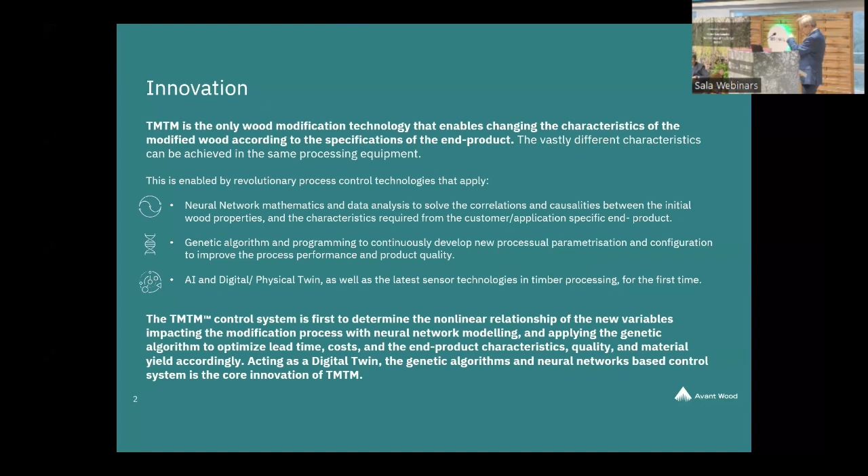Let me see what happens. Here, I'll go through this very quickly. Maybe I even skip this. So this is the main frame, because that is too much technology. I'll come back to that.

So there is the global problem as we see it: a lot of CO2 emissions in nowadays building construction industry. We have a lot of wood waste. We want to improve the utilization rate of timber. And there are, as we heard yesterday, hundreds of underutilized, low-value wood species that could be utilized.

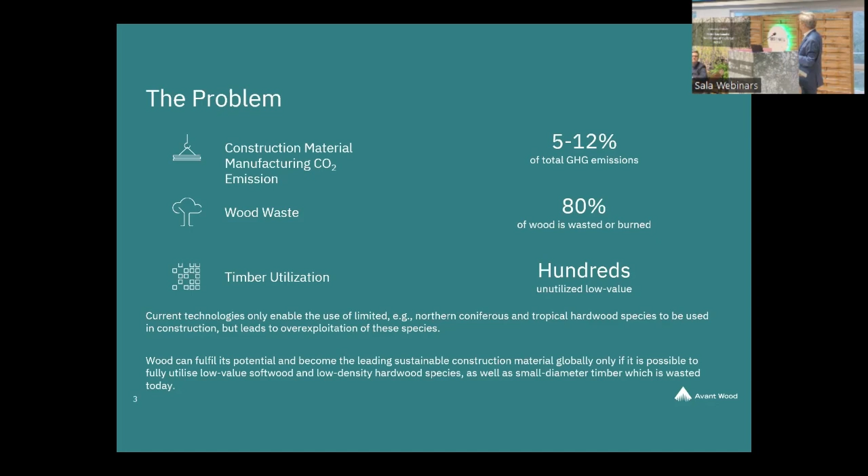Our solution here is an integrated technological unit that combines the drying of timber with densification of timber, in order to enhance the mechanical properties, hardness properties, dimensional stability, equilibrium moisture content, permeability of the timber, and so forth. There are few boxes; this is integrated, and the key issue is our patented control system that we apply in the process control. And that's about it - no chemicals and sustainable.

I want to highlight a little bit the philosophy of how we are approaching this problem. There have been a lot of keywords in this seminar, but maybe for the first time I say artificial intelligence, which is seen as a high-level future technology that will solve all the problems from climate change to social equality, whatever. I hear politicians using that word a lot.

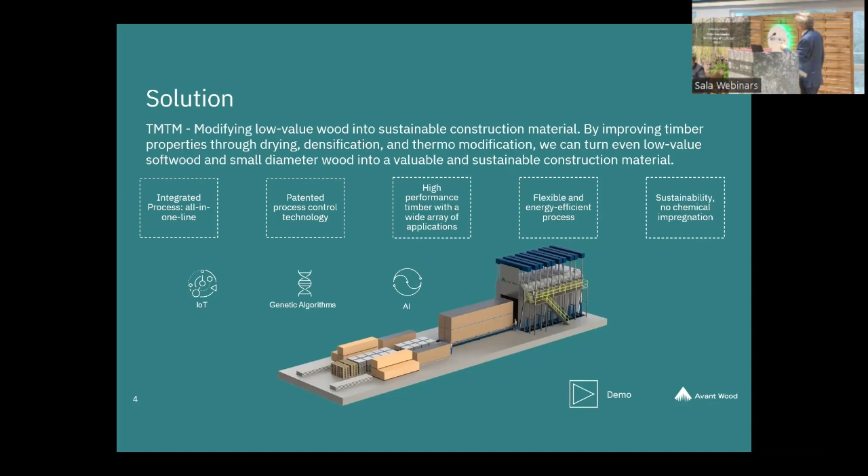But here is our approach to the problem, because artificial intelligence itself doesn't say anything - it's two words. So from our prospect, artificial intelligence is, first of all, deep sensing. We have a lot of different input parameters in the timber, and at the other end there are a lot of customer expectations coming up, like color, hardness, strength, density, dimensional stability. With existing solutions, when you process timber, you get standardized 2x4s, with moisture content being about 18 to 10 or 8, and that's about it.

But we are solving this, and it's a never-ending story. So first of all, we are using neural network mathematics to find the correlations and causalities between the inputs.

Is there a laser here? Yeah. It doesn't... it works here. It works here, but not here.

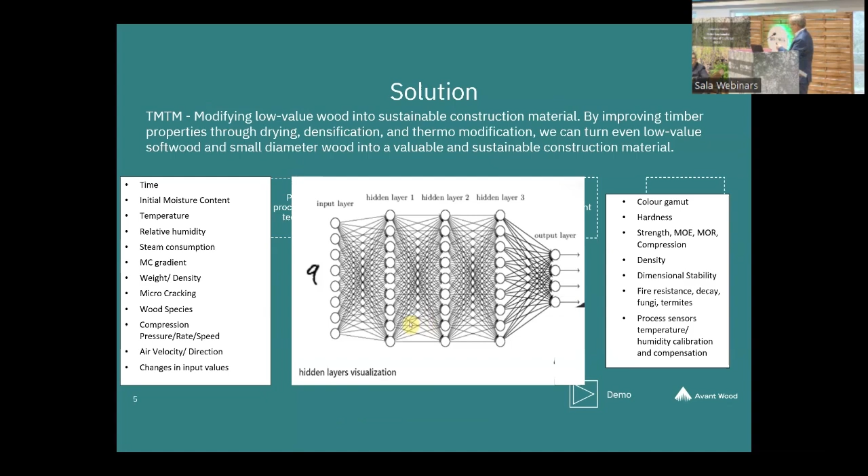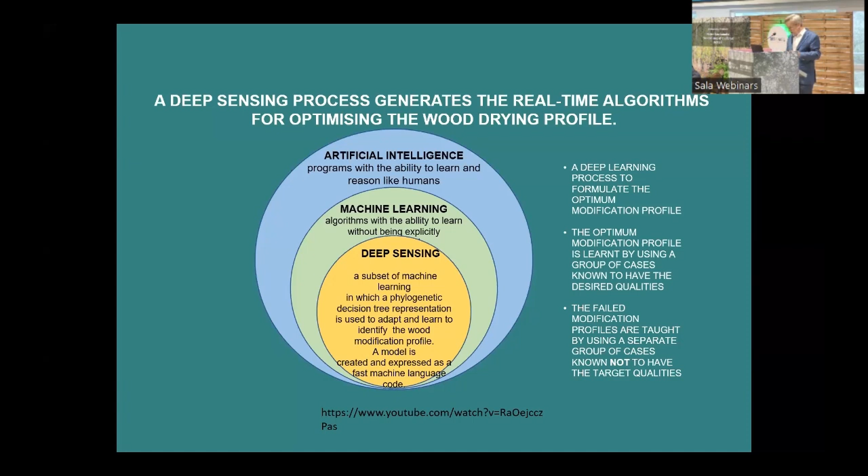So we aim to find the correlations and causalities between the inputs and the customer-specified outputs. That is deep sensing for us. Then we apply machine learning, genetic algorithms, to continuously improve the process parameters in order to get an improved and customized end product. And then as a whole, there is artificial intelligence that has the ability to learn like a human. I see artificial intelligence this way: you need to have the application, not just talk about the general level.

So this is a brief presentation of our process, in very general form. So you have

green timber that you put in, and simultaneously we apply a certain mechanical pressure to the timber. We don't use sticks, we use aluminium cell plates. Three reasons for that, and we can apply mechanical pressure on timber in the beginning, just to hold them straight, avoid warping, twisting, things like that.

And then we increase the temperature. We take care of the relative humidity and all the things. We can, so to say, listen to the timber, because when the parameters are wrong, the first thing that the wood starts to

make is emitting so-called ultrasound, around 150 kilohertz emission, related to the microcracking of timber. So then we know that the process parameters are getting wrong, and they have to be adjusted.

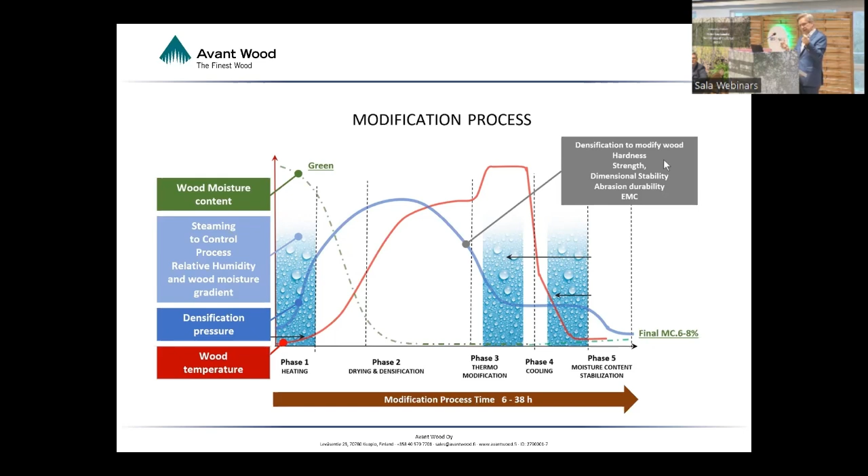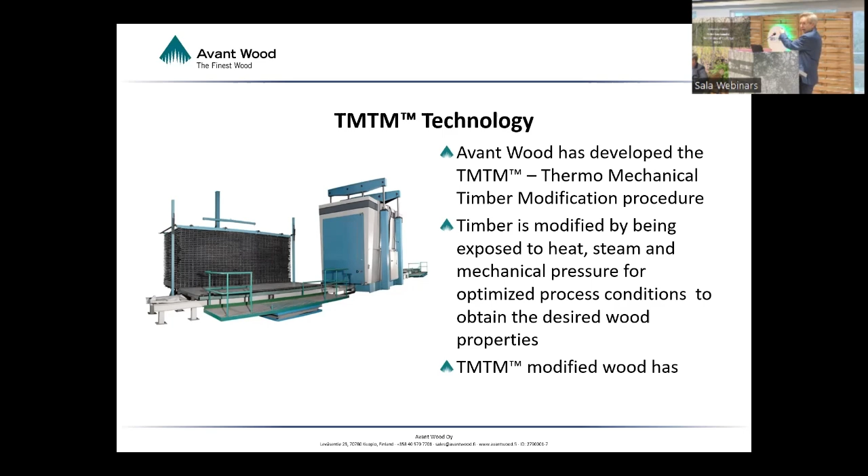Let's go where I'm going. This is one example of the unit in Slovakia. And yeah, you can all read. There is all that I have already said, but

I added some slides here. That's why. What are the advantages of the product? As said, customized products, increased density, high dimensional stability, because we lower the equilibrium moisture content and also improve the permeability of the wood.

Sustainable, no chemicals used in the process. You may select the application that you want to do.

It's not the— I have nothing against UPM or Stora Enso or Metsä, which are the big Finnish companies, but obviously you cannot order anything specified for you. The processes are mass production paradigm based, whereas we want to have it

as you would call mass customized paradigm in the process. I'll take a little bit back. Yeah, so this is overall, Andreas, you discussed yesterday about the value chain and creating the new value chain. This is how we see that in the forest you have big logs, you have small logs, and then you

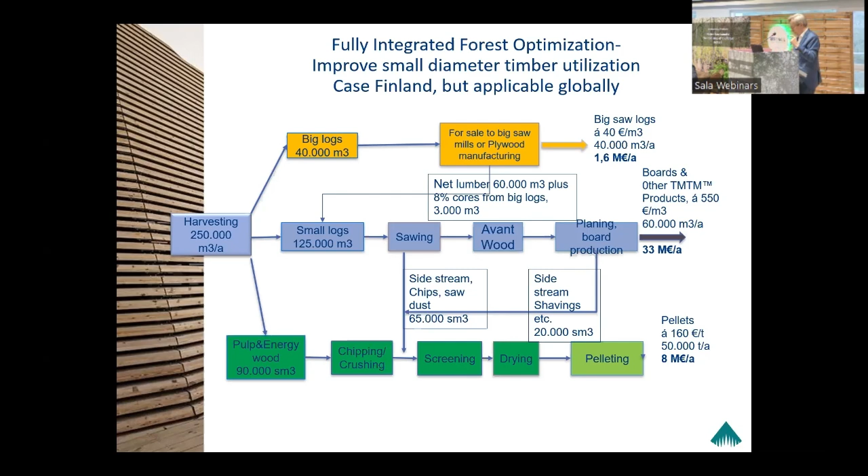Now I'm trying to— this is our testing unit. So what we call, as you remember, talking about artificial intelligence, one keyword is the digital twin, where you can test the process parameters. We have a physical twin.

We can make with this, it's about 1.5 meters long. We can make the modification schedules of different species, and when they are approved, then we can kind of upscale the results to the customer, and then we can provide them with the new modification schedules.

And when I said that we cut off the lead time by 90%, it means that the customer can make a new product creation much faster than with the conventional way.

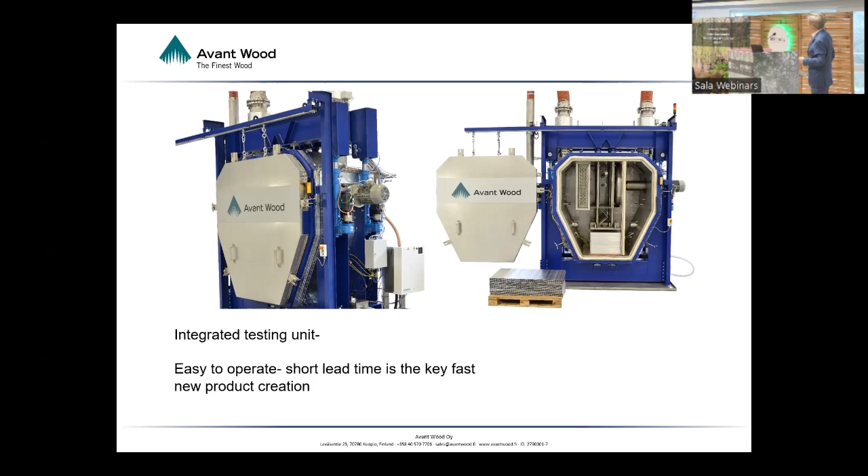Yeah, that is already spoken about. Also spoke about the benefits. Megatrends, we discussed about those.

We believe that there are, in our business model, four megatrends: sustainability, renaissance of the wood material, resource scarcity that we have been discussing, and then digitalization and artificial intelligence, which is our core competence. And those megatrends will affect all the society, customers, technological development, competencies, and so forth and so forth.

So that is the base. But now I'm coming to a business case example.

One is, I'll go through this fast, a multi-layer parquet. Usually when you make, for example, oak multi-layer parquet, you take a plank of say 50 millimeters, and you dry it around 3 months.

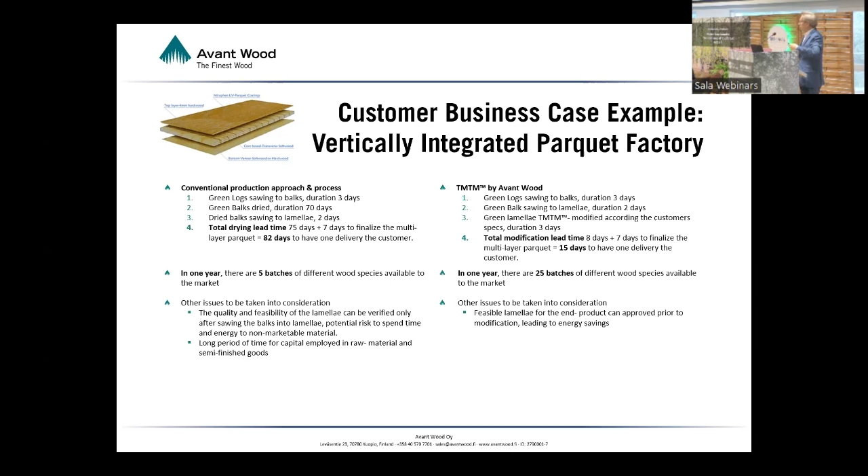There is the same case but I'll skip it.

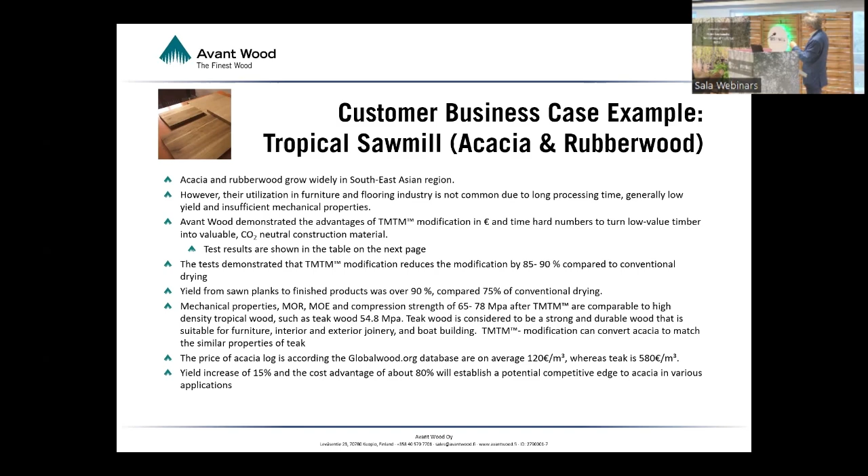Since we are active globally, we had a case in Vietnam and Malaysia. We improved the utilization of acacia and rubberwood. Here you can see the results: we reduced the lead time by some 85–90% and simultaneously improved the mechanical properties.

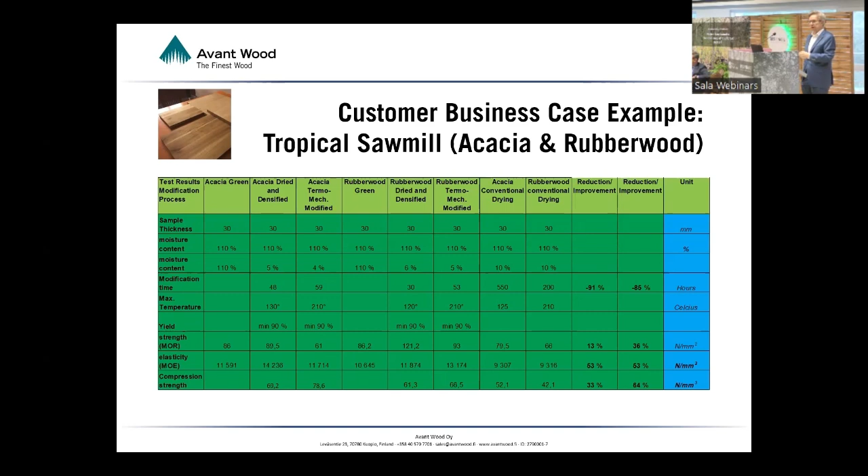Sorry Pekka, we are out of time. I am out of time, that's why I'm... Two minutes please, thank you.

And we discussed, that's very typical for me, this building in Helsinki, Löyly. We brought there 18 kilometers of glulam board, and if you take a close look, it's all made of small diameter timber. The blocks of the building were 75 millimeters thick, 18 kilometers of wood, 6,000 different pieces and modules. So far, since 2017, zero complaints about the material.

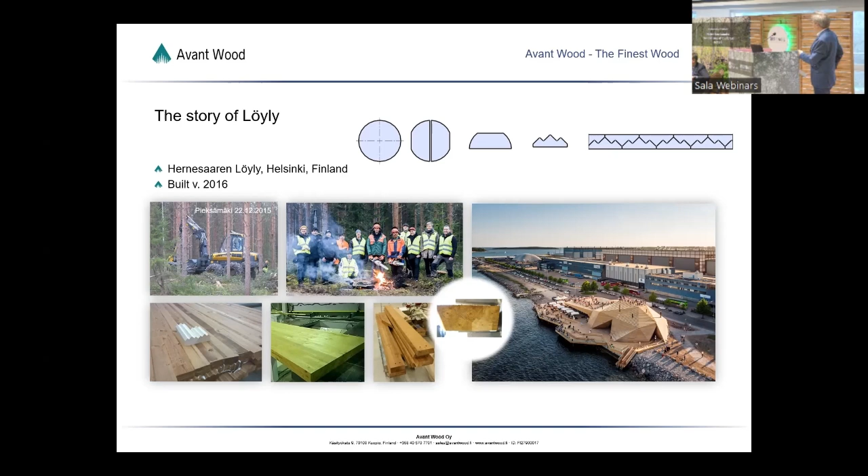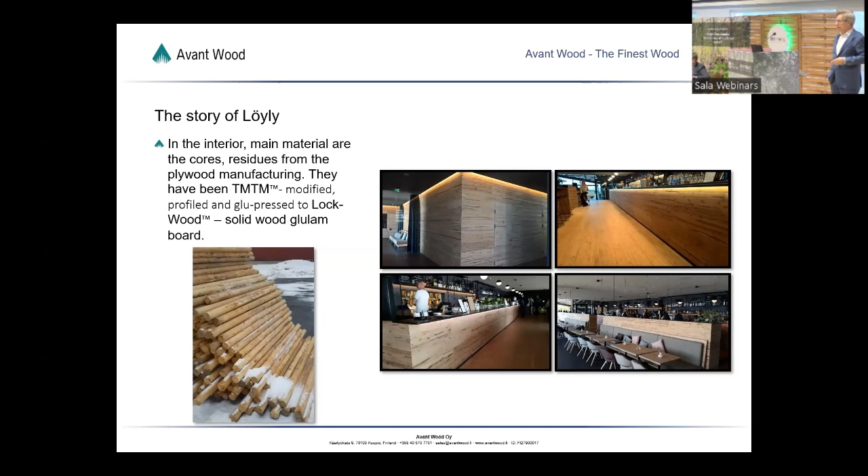Right, and now I'm running through. These are from the inside, made of cores, as you see, residues from the plywood industry which have no value, and we converted it to a valuable end product. The value of the cores is something like 30 euros, and then we sold the material around 800 euros per cubic meter.

Here is from the forest, and here also. There you can see the glulam board. We have applied only small diameter timber. I would like to discuss with you the Lock-Wood, our innovation, but not this time.

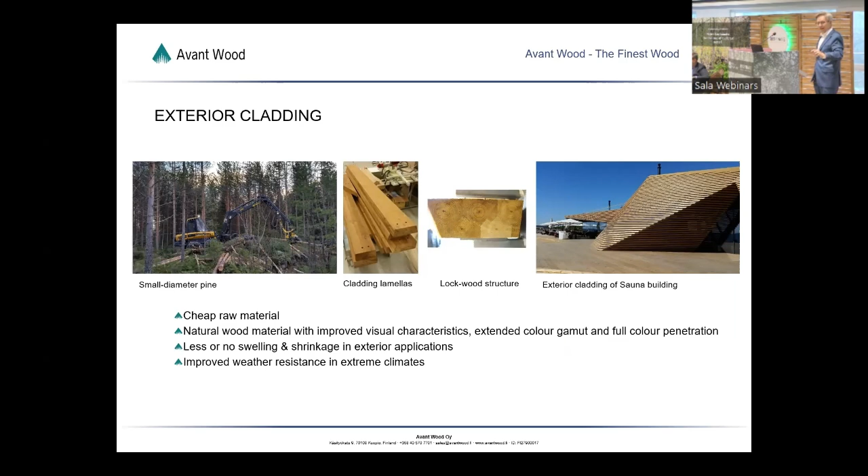Yeah, everything is made of that. There is juvenile teak plantation and falcata. They are all over the world.

This is one I have to have a minute for: OPT, oil palm trunks, a source of global catastrophe in terms of CO2 emission. There are 100 million cubic meters of OPT that you can utilize, and 100 million cubic meters per annum every year.

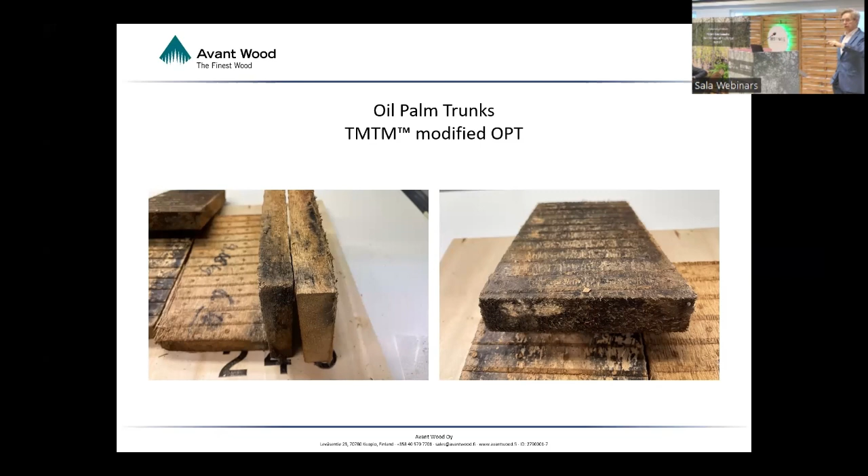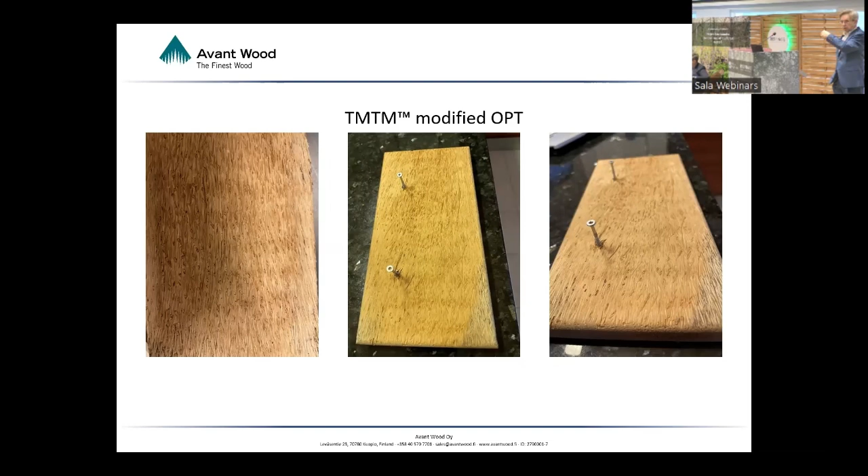What we have made, we have converted it with our process into a usable board from zero-cost material. And this is the final result. We are now in the process to put it on the market. Sorry, yellow card.

In Bhutan, not going through the wood species, the Bhutanese brought us 31 species of wood, and we used 33.5 hours to modify them and give them the feasibility study.

And now we are in the creation of a mindfulness city in Bhutan, where they are building up a wooden city bigger than Singapore. That's it. Okay, thank you.

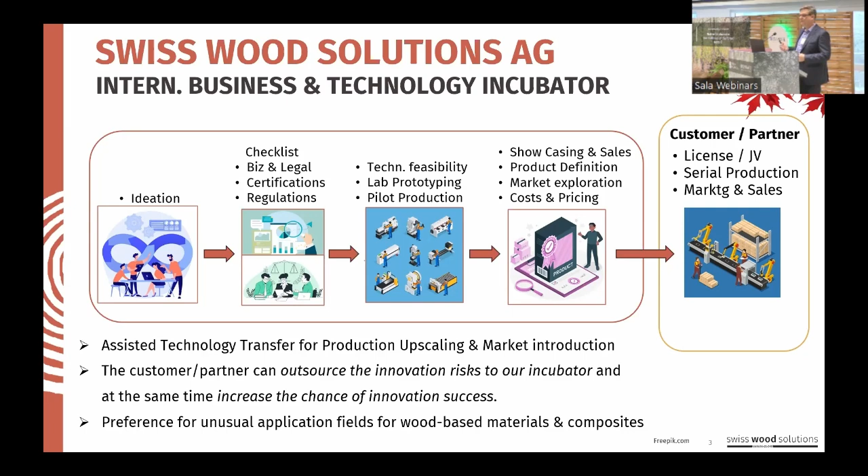We keep the IPRs on our side and license this out to him. So in the end, the customer can outsource his innovation risk to us, and he increases his chance of innovation success. That's the basic idea of our technology and business incubator.

And this time it works. So let me give you a brief intro into our technological approaches. We have more than one, but the core technology is the Green TM+ process. It's kind of related to what Pekka told us—not really the same, but it comes close, a little bit different.

We also apply it to different materials, so it's always a combination of timber or veneers plus additional other materials. This is not necessary, but sometimes it's needed. With this process, we can modify hardness, density, color, mechanics, dimensional stability, and we integrate additional functionalities—this can be optical or electronic functionalities. So we add something to the wood composite.

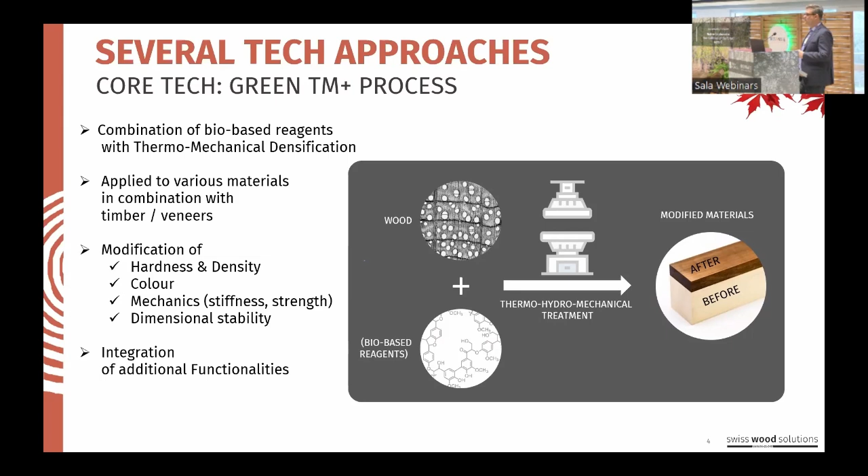This is an example, just to give you an idea about the machinery needed for this process. Of course, you need special machinery, as you can see. For example, with the beech example, if you would like to densify it from 740 kilograms per cubic meter up to 1 ton per cubic meter, you would need machinery capable of pressing with 8 megapascal. So you cannot do it with standard wood industry machinery—you need something special.

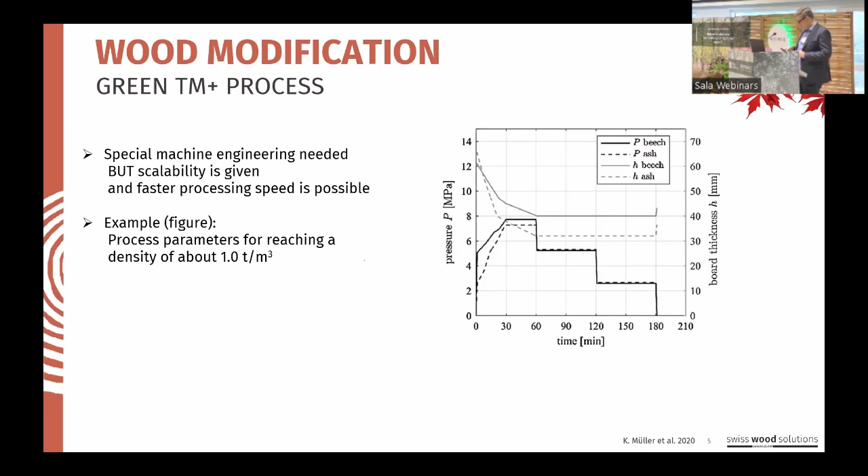It's just one example. In the end, the material remains highly anisotropic, as you can see. The resulting mechanical behavior is, among other parameters, strongly influenced by the angle between the grain and the densification direction, but also depending on the load direction when you use the product in the end. So you really need to know what you are doing with the wood and what the product is needed for in the end—otherwise, you cannot really optimize the process.

As you can see, when you densify in the radial direction and then test it with a compression test in the longitudinal direction, you have a strong correlation between density and compressive strength—that's the diagram on the left. But when you do the same densification process and then test compression radially, you have this correlation not at all. So you need to know what you do with the product in the end, and adapt the process accordingly. But in the end, our material is not brittle—it still retains its highly appreciated ductility.

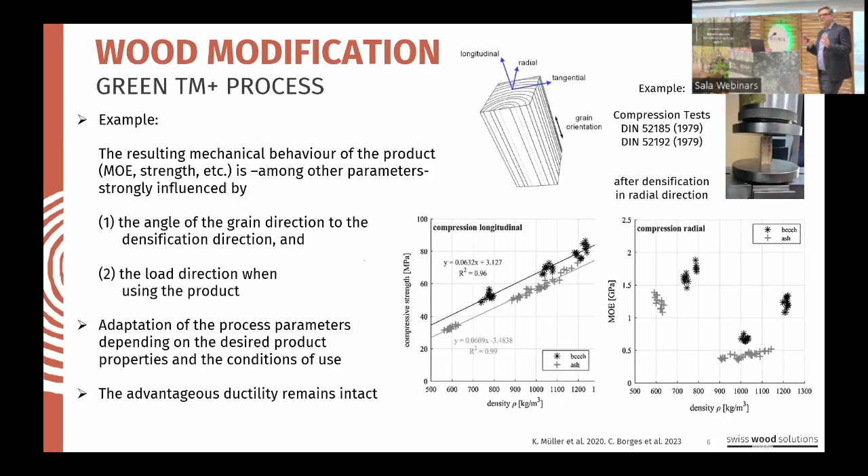Christoph Henschel came up with the idea to improve the sound of his Stradivari, which was quite ambitious. He took away the ebony fingerboard and the string holder, the tailpiece, and we replaced the ebony with spruce, specially modified for this application. We have a very high speed of sound conductivity along the grain, and very low acoustic damping.

This depends on the wood species and on the modification process, and in the end it was really what he thought was needed for his instrument. He's still playing it now, three years later, and he's still happy with it. He says yes, Stradivari would have applauded this.

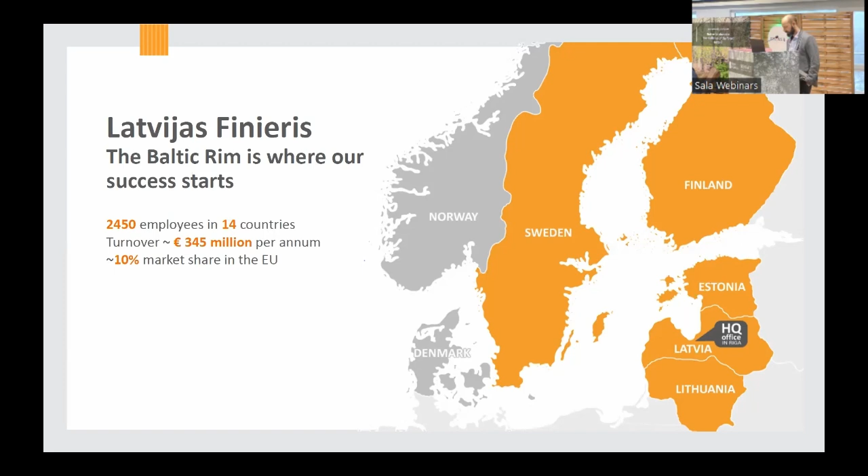Our main focus is on the production of birch plywood, but we are also expert in other areas. For example, we grow birch seedlings in our own tree nursery, which we then offer to forest owners and forestry companies. We are also active in forestry and offer services such as reforestation, soil plantation preparation, planting and maintenance of forest areas, timber transportation and other forestry work.

We also have our own metal working factory, where we manufacture and assemble all necessary equipment for our own production and research, but also manufacture machines for other customers. And like any manufacturing company, plywood production has many different byproducts, and this gives us the opportunity to develop other products with higher added value.

We have therefore identified ways to use 100% of the byproducts we produce, and one of our latest innovations of the use of byproducts is the extraction of betulin from birch bark. Even as a plywood manufacturer, we also have our chemistry department, where we are working on sustainable binders - but more on that later.

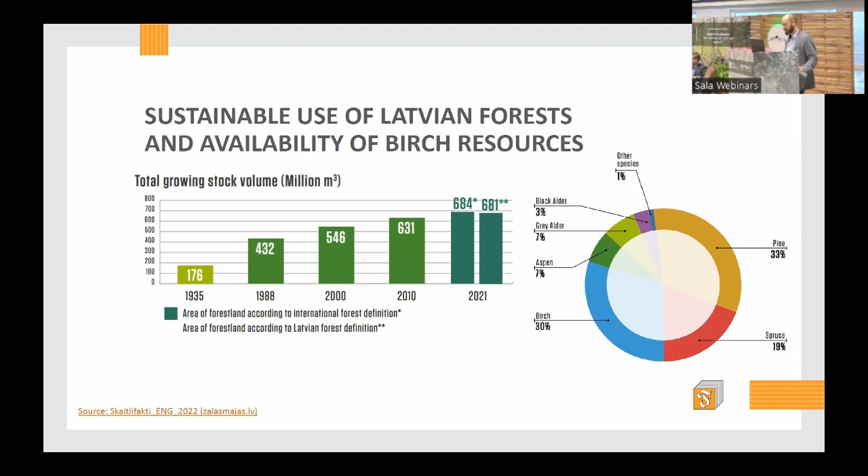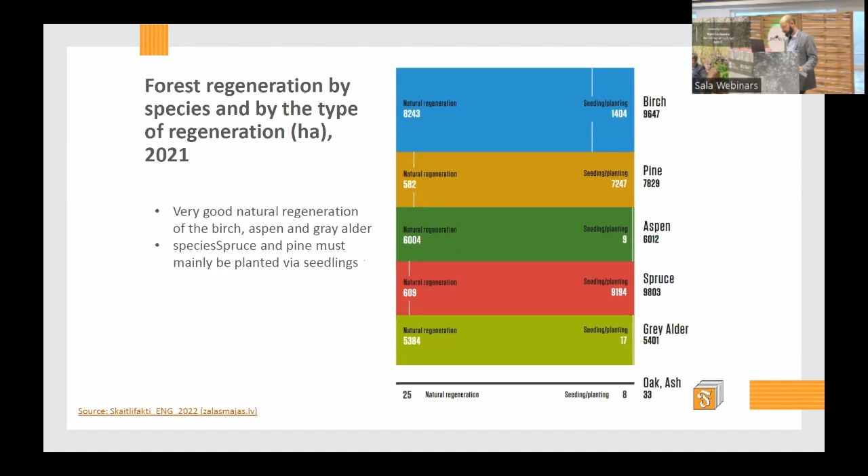In order to utilize the resource potential of the birch species in the northern Baltic Sea region, we can speak of more than 1 billion cubic meters of birch trees. This compares with an annual consumption of approximately 20 million cubic meters. So, next slide.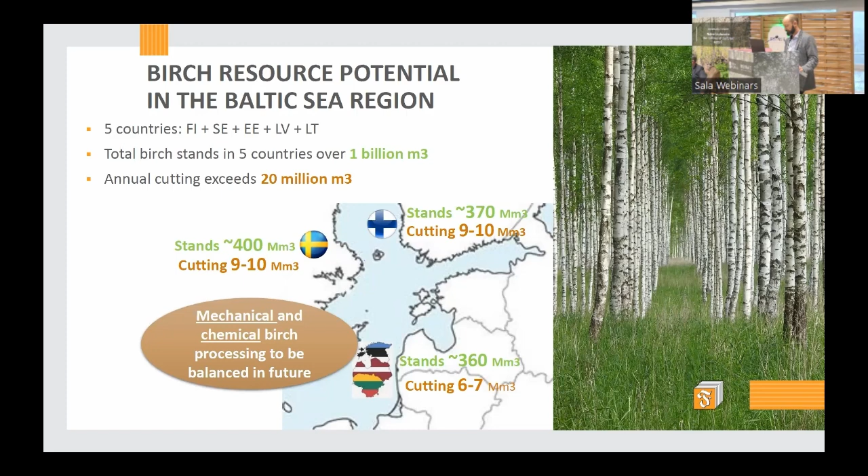As Latvijas Finieris, we are of course also actively involved in forest management with around 10,000 hectares of own forest land and a tree nursery where we produce and sell around 1.5 million seedlings, especially grown to meet the future needs and quality requirements of our production.

The birch seedlings, which are on average 1 meter high, are strong and hardy because they have been grown in a nursery for 1 year in an open field. Such seedlings are mainly recommended for areas with a potentially high proportion of greenery and make it possible to reduce the agro-technical maintenance cost.

In order to offer forest owners the opportunity to diversify their plantations with mixed stands, around 20% of the total production consists of spruce and alder.

Now we come to a topic that started for us in 2015 and is now reaching its limits. You need to know that we produce our phenolic resin for gluing the veneers by ourselves, and we have our own impregnation channels where we produce our surface films by ourselves.

Therefore, our chemistry department, in cooperation with Stora Enso, has developed a method that reduces the content of fossil substances in binders. So we replace fossil phenolic resins with lignin.

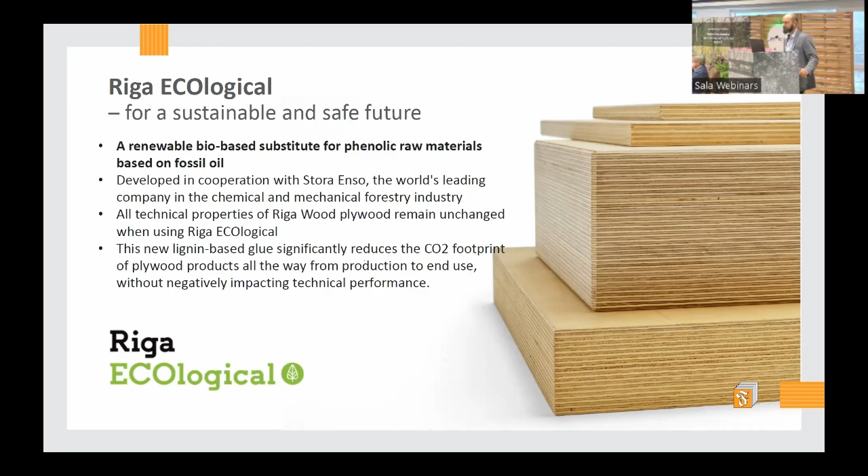Wood consists of 3 main components: cellulose, wood sugar, and lignin. One third of the wood consists of lignin, so this is the most common natural glue in the world. Lignin is a binder agent between the wood cells so that they are stuck together.

However, lignin used to be a useless byproduct of the paper industry and was mostly thermally processed. This development of a new lignin-based binder has significantly reduced the CO2 footprint, formaldehyde, and VOC emissions of plywood production and all the end products, and this is important without negatively affecting their technical properties.

As we produce our own phenolic resin-based glues and want to implement these 100% to meet the increasing demand of our mills for lignin-based glues, Latvijas Finieris has decided to participate in the VIBOND project. The main goal of the VIBOND project is to achieve zero use of fossil resources for production by 2050.

This project was funded by the bio-based industry as part of the European Union Horizon 2020 Research and Innovation Program, and Latvijas Finieris has taken the lead in this international consortium.

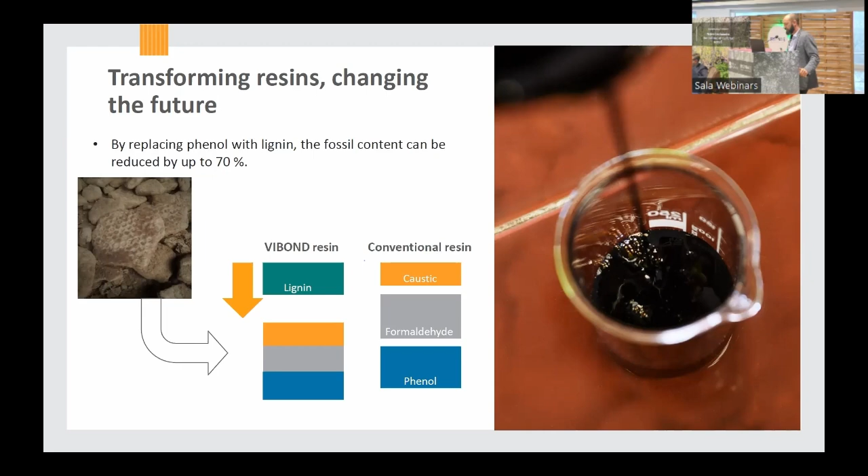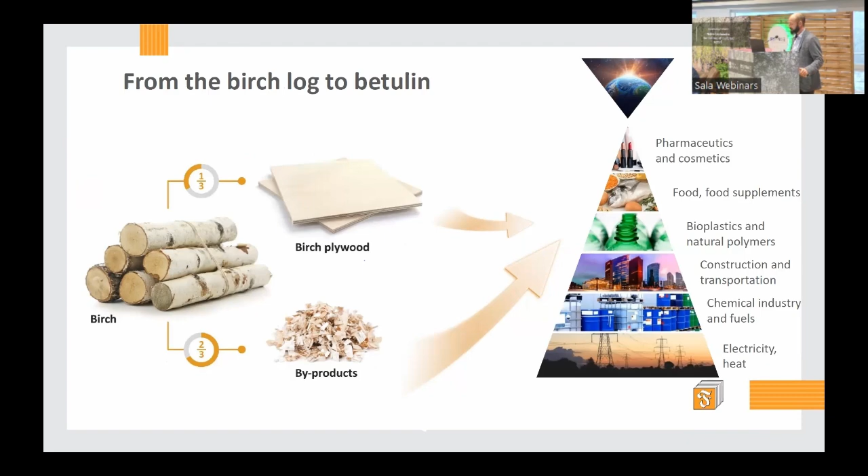As already mentioned, plywood production also generates byproducts. To be precise, only one third of the birch mass is used to produce plywood. The other two thirds are byproducts. In the past, the only way to use these byproducts was to generate heat. This naturally raised the question of whether there is a way to use these byproducts differently, and if so, with what added value.

We have found many applications for our byproducts. Most of the biomass produced is used in the local market, for instance as chipboard, other press materials for packaging, pellets, and WPC supplements. We also export biomass, most of which is used in pulpwood production. A large part goes to biorefineries and is also exported as pellets and added to thermal utilization. The part used for our own heating production is dry waste that cannot be used in any other production process, and birch bark.

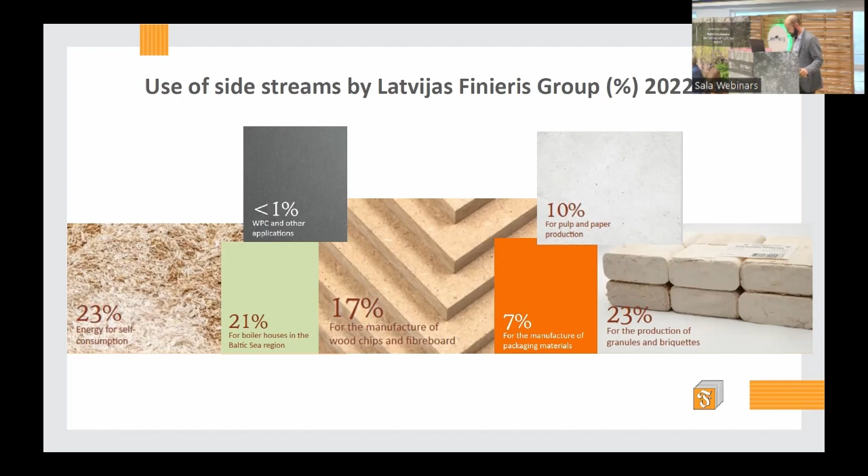In cooperation with the Latvian State Institute of Wood Chemistry, we have developed an innovative use of birch bark: betulin, or the birch bark extract. Betulin is found in the birch bark and is the main component responsible for the white color of birch trees. It is made by extraction from the outer birch bark, and it's known for its healing properties.

So what does birch bark extract contain? The largest part is betulin, with 60 to 97%, depending on the crystallization and purification parameters. The smaller part is lupeol with 2 to 10%, betulinic acid 2 to 6%, and tannins.

Each of these ingredients has been studied extensively and offers many health benefits. Betulin has shown anti-cancer and antibacterial properties. Lupeol has also shown these properties plus anti-inflammatory effects. Betulinic acid shows the greatest effects, and tannins are known for their antioxidant properties. The greatest advantage of our birch bark extract is that it combines all these substances and therefore has the positive properties of all of them.

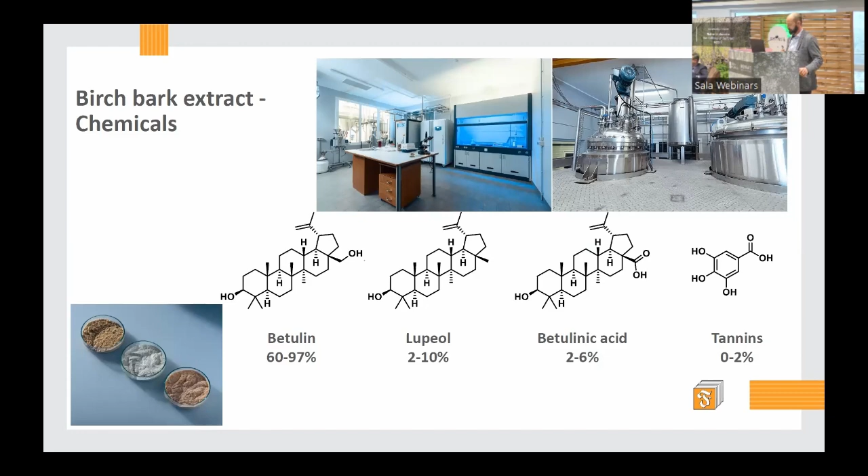Thanks to these extensively studied properties of birch bark extract, many unique applications have been found. For example, in the food industry as a food supplement and additive, in cosmetics as skincare where betulin can replace synthetic emulsifiers and preservatives, as an antioxidant with psoriasis symptom healing properties, and also in healthcare.

The birch bark extraction journey began in 2011 when Latvijas Finieris heard the word betulin for the first time. In 2016, in cooperation with the Latvian State Institute of Wood Chemistry, research into betulin extraction under laboratory conditions began. In 2022, a pilot plant for betulin extraction called Betulin Lab was finally opened in Riga. With this plant, we can produce up to 5,000 tons of raw materials for extraction annually, and the purity level can be increased to 99.8%, depending on the end application.

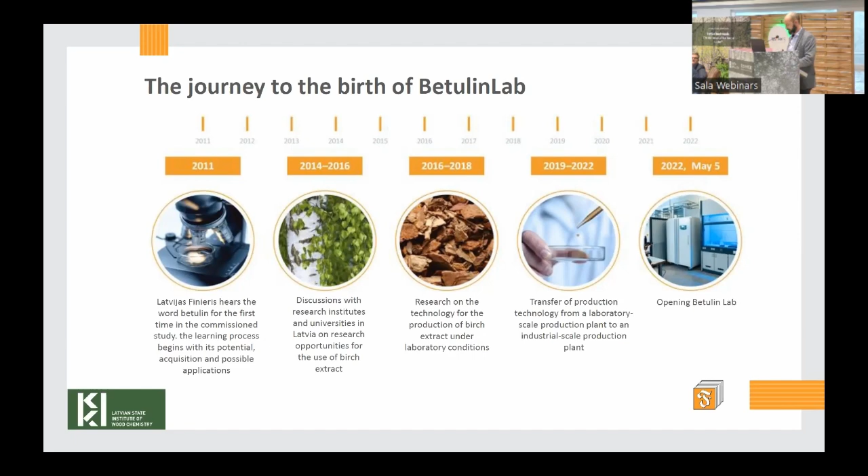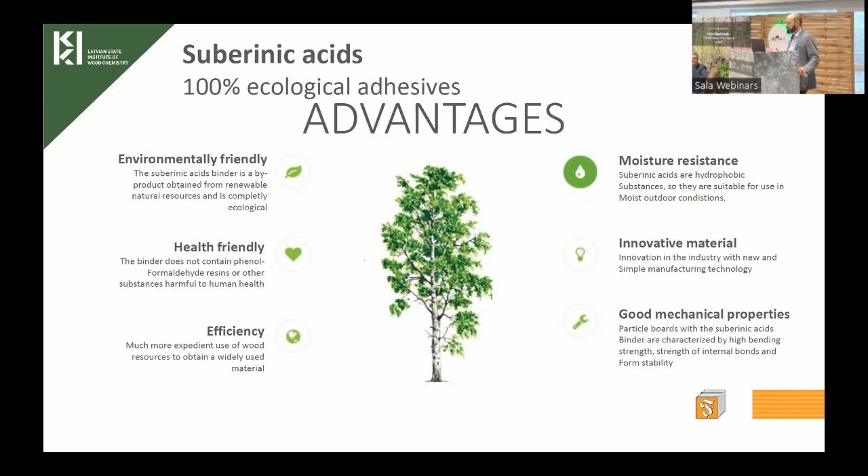Now we come to another innovative ingredient from the birch bark: suberinic acid. The method for producing suberinic acid was also developed by the State Institute of Wood Chemistry in Latvia. It has the potential to become a 100% ecological glue. Latvijas Finieris has acquired the license for the production of suberinic acid, and the biggest advantages compared to conventional glue are its environmental friendliness, the elimination of fossil materials needed for its production, health benefits, and the efficiency which makes it possible to glue wood to wood.

The outer birch bark contains 30% betulin-containing extracts, 16.4% lignin carbohydrate complex - mainly lignin, cellulose, monosaccharides, and polyphenolic compounds - and 53.6% suberin. Suberinic acid and the lignin carbohydrate complex are used as binders, which together make up 70% of the birch bark.

For example, 3.4 million cubic meters of birch was felled in Latvia in 2017, and around 55% of this volume, meaning 1.9 million cubic meters, is industrial wood from which birch bark can be extracted. So in Latvia alone, around 20,000 tons of absolutely dry binding agents and other raw materials could be obtained that can be recycled.

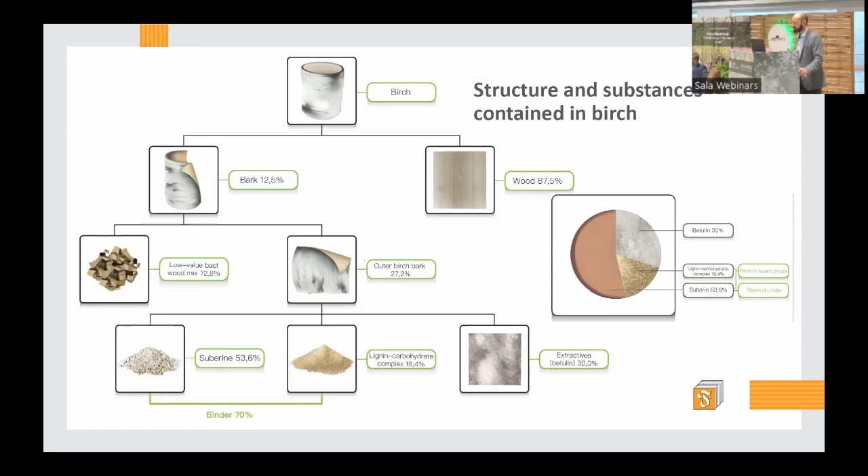In conclusion, we can say that the wood-based material birch has a lot of potential, and we are ready to work as a specialist on sustainable solutions and implement these in the production process to increase the added value and sustainability of our products.

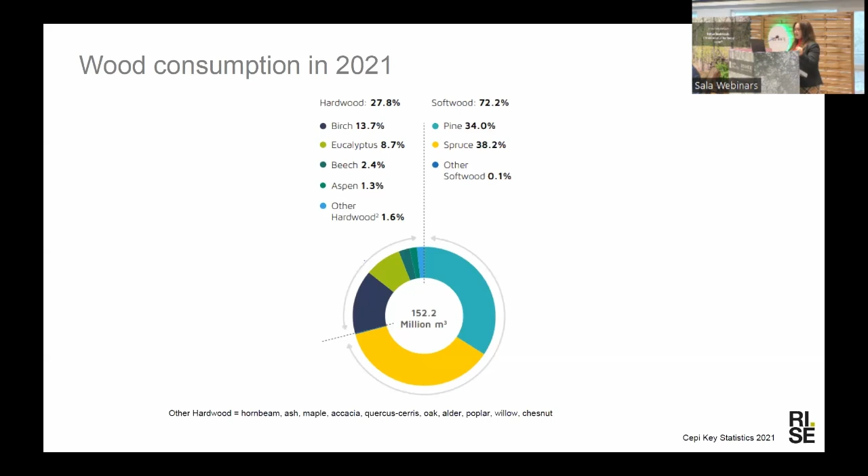So we start with wood. This is some statistical data published by CEPI, the wood consumption in 2021. What we see here is the ratio between hardwood and softwood: it's 30 to 70% hardwood compared to softwood, and the main species are birch and eucalyptus.

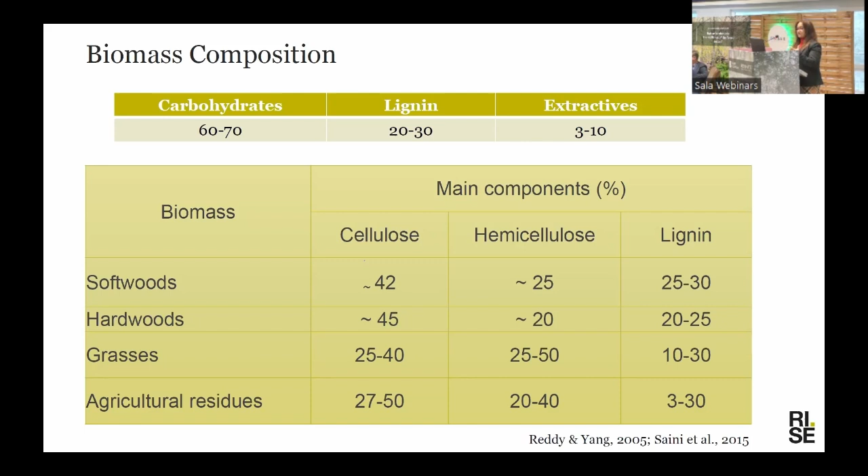When we talk about different biomass, we don't only have the visual difference we saw in the field yesterday for the plantation and the oak forest, but a difference in the different components of the wood. Specifically for hardwoods, looking with the eyes of lignin, we have less lignin than in softwoods. We also have less hemicellulose, but most important is that the structure is different. The way these lignins and hemicelluloses are bonded to each other is different, and this affects how they are processed to deconstruct the biomass, their properties, and the yields.

So then, very fast, we start with the feedstock. We have softwood and hardwoods, and in terms of the structure of lignin, softwood is mainly G units, starting from the biosynthesis there with coniferyl alcohol. When we go to hardwoods, we have a mixture of coniferyl and sinapyl, and some species have large amounts of coniferyl as well.

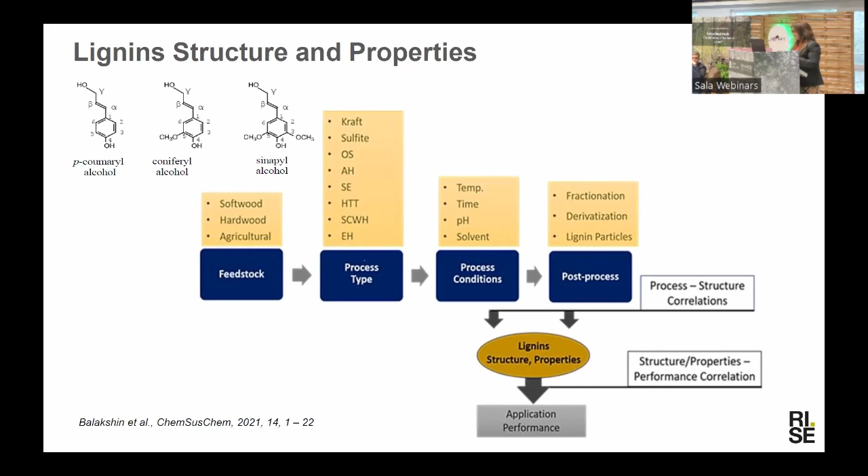So the idea is, as we go from softwood to hardwood and grasses, the structure of the lignin becomes much more complex. The oldest deconstruction pathway to deconstruct biomass is the pulp and paper industry. Inside the pulp and paper industry we have different technologies: kraft, sulfite, organosolv, and now we have this boom of different biorefineries also using different technologies to deconstruct the biomass. All this changes the structure of the lignin that we will get to work with, not even counting the difference inside each different technology.

So this is another data by CEPI. We have 720 pulp and paper mills in Europe, and as we can see, we are using less paper, so the production of pulp and paper is decreasing.

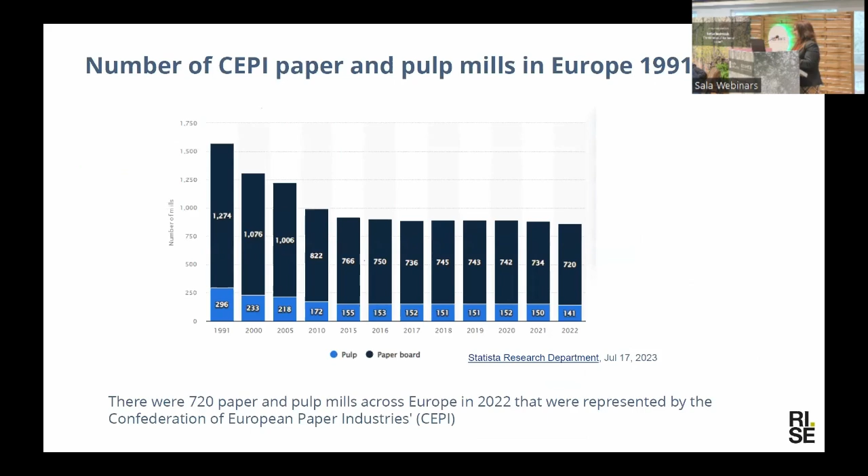But why am I talking so much about pulp? It's because we are deconstructing the biomass, so when you deconstruct the biomass you also get the lignin. But in the pulp and paper industry, the main goal is pulp, to produce paper.

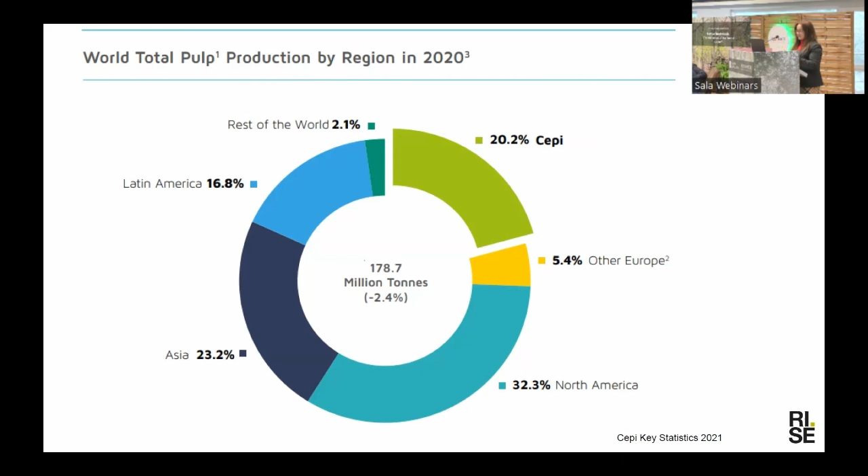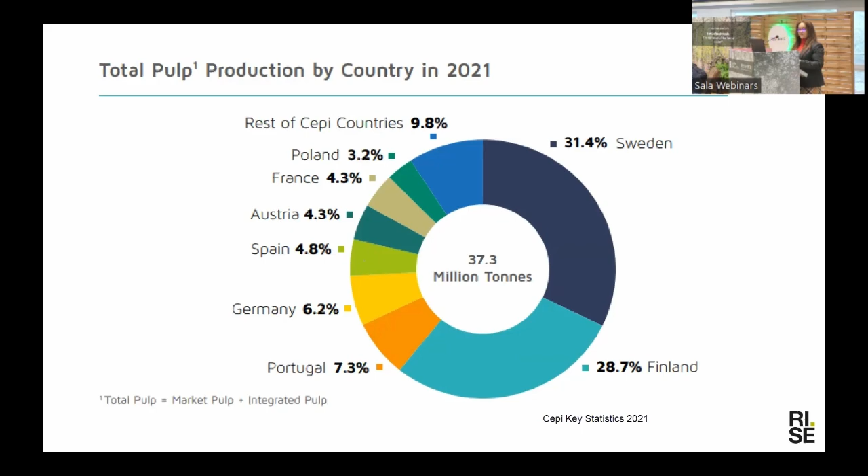This is showing the distribution of world total pulp production. We see Europe is responsible for about 25% of the pulp, followed by North America as the main one, then Asia and Latin America. Inside Europe, Sweden and Finland are the main producers, and we see here Spain with about 5% of total pulp production.

Then we look at the potential of lignin production. Just looking at the hardwood kraft pulp in 2022, this was about 80 million tons. So if we now look at the amount of lignin we get per ton of pulp produced, we have a potential lignin production of 18 million tons per year. And why am I talking about potential? Because first, not every pulp and paper mill recovers the lignin—most of the lignin is used to burn for energy.

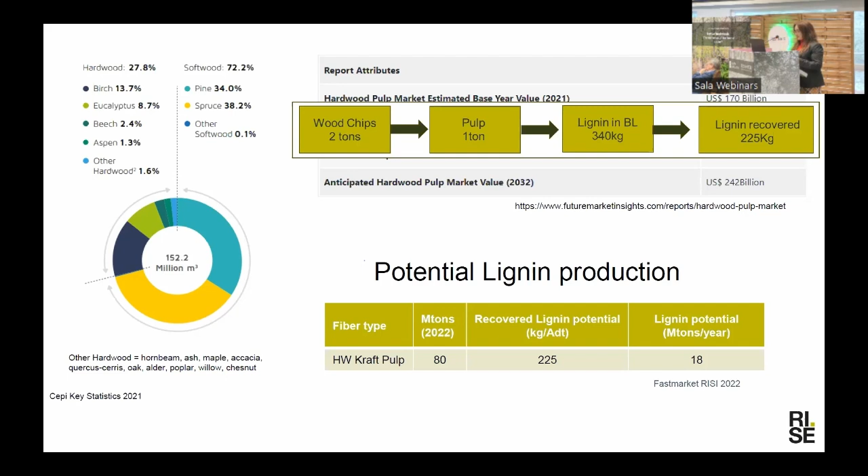So again, they are overlapped here. Lignin producers: the technical lignin, the majority of lignin available on the market is lignosulfonates. About 80% of the lignin is lignosulfonate, about 15% kraft, and then we have another 5% that is for the biorefineries, hydrolysis, and soda pulping.

In terms of kraft pulp or hardwood pulps, what do we see? We see LignoBoost in Sweden that recovers about 10,000 tons of lignin per year. This can be used for hardwood and softwood, but both LignoBoost and UPM with its facility in the US, used to be Domtar, produce another 25,000 tons of lignin per year, mostly softwood, but they also can process hardwood. Then we have Stora Enso with the Sunila mill that was producing 50,000 tons per year, but we all know Sunila is closing its facility, so there is a gap in the market now, because Sunila was selling lignin, but they will recover lignin in another facility.

Now we go to South America, we have Suzano that produced 20,000 tons of lignin per year, and it's eucalyptus lignin, it's hardwood. Then we have Klabin, 500 tons, that switches between hardwood and softwood. And then I'm using just two examples of biorefineries, and both of them use hardwoods: Fibenol, which is in Estonia, and Renmatix, which is in the US.

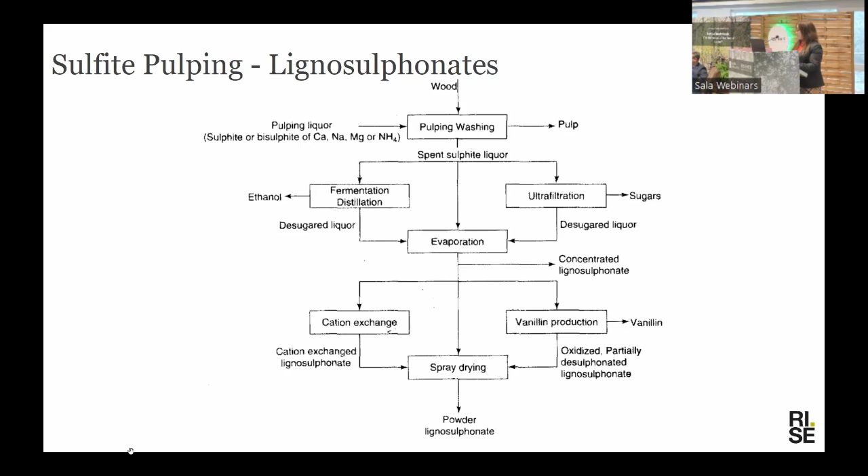But we have to recover this lignin. What process do we use to recover this lignin? The majority of the market is lignosulfonates, so we start with the wood, then there is a pulping process, and the lignin is recovered through spray drying. If we look at the beginning, close to the first box, there are different counter ions used during the pulping, and these will give lignins with different salts and with different properties. Lignosulfonates are water soluble, they are quite a different class of lignins.

Then we come to the LignoBoost process that was already talked about in a previous talk. After the pulping, the weak liquor goes through a series of evaporators, and mostly after this concentration, this lignin was burned to generate energy. But then it can be recovered by using the concentrated black liquor, acidified by CO2, and then this lignin is precipitated, re-slurried in acidic water, and then the pH is decreased, and this lignin is precipitated.

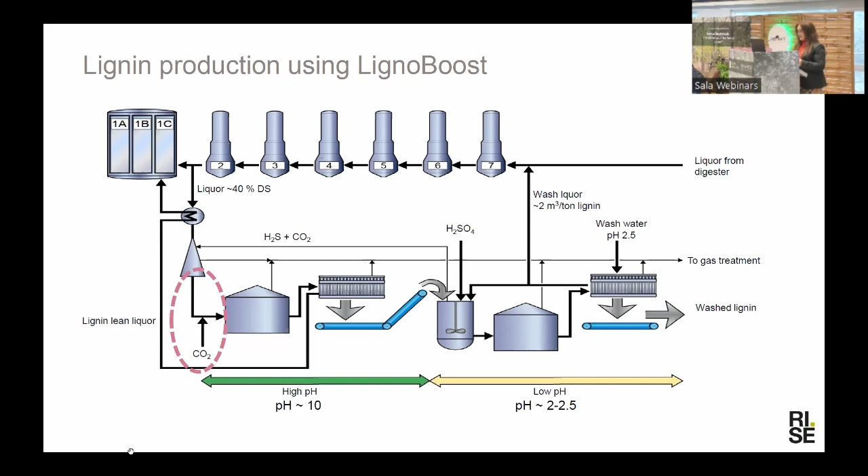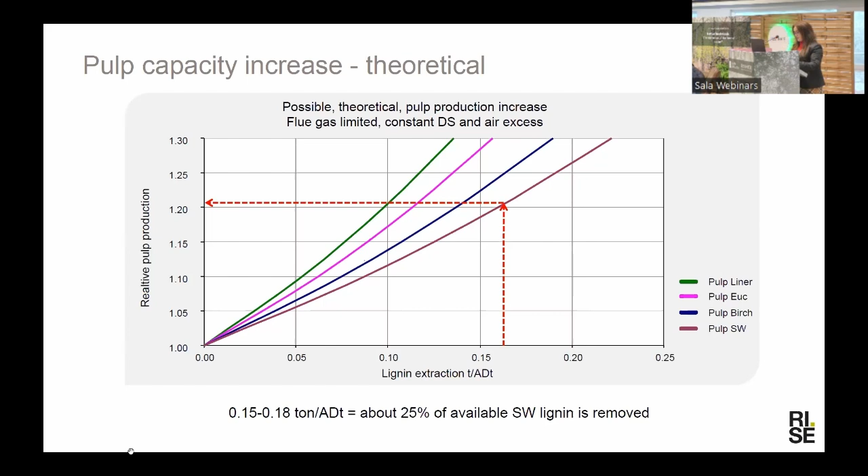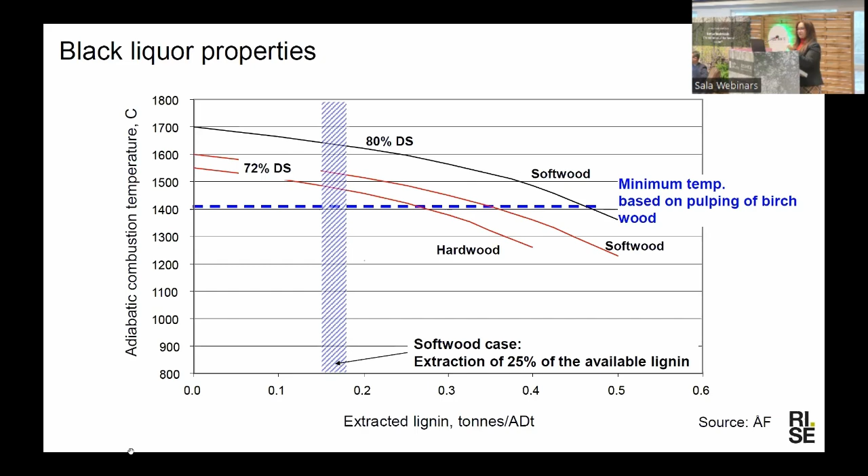But by removing this lignin, we decrease the concentration of solids in the black liquor, so then we have less energy, the combustion temperature is decreased. But there is an amount of lignin that can be removed that still has an acceptable loss of energy. What's shown here in blue is experimental data showing that when we pulp birch, the combustion temperature can be decreased from about 1700 to 1400 by removing this lignin. So in the birch process, when we do the pulp and recover the lignin, the industry can cope with removing more lignin compared to softwood.

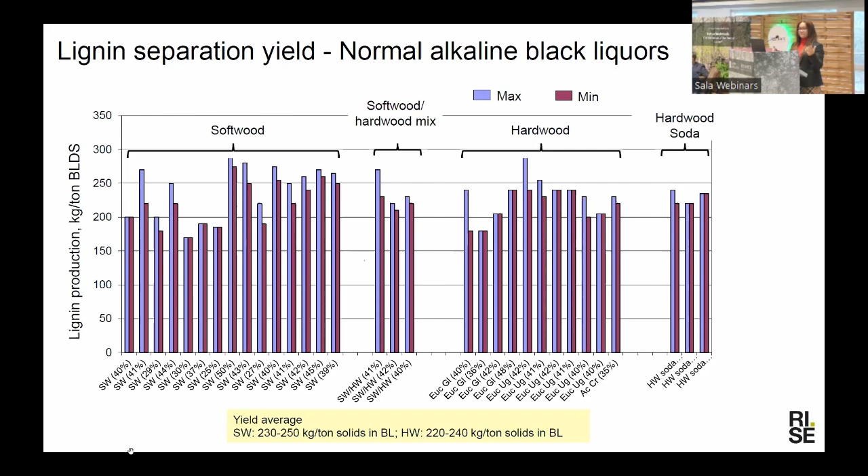On average, we can say that softwoods give a little bit higher yield of lignin based on the total solids in the black liquor compared to hardwood. But I can say that hardwood is a little more challenging, exactly because of the interaction between lignin and hemicellulose and the structure of those hemicelluloses.

Then another technology to recover lignin, quite similar to the LignoBoost process. Again, the weak liquor goes through a series of evaporators and then is concentrated. But the LignoForce process that was created in Canada introduced one step where they do oxidation of the black liquor, and they claim this decreases the smell and makes it easier to filtrate.

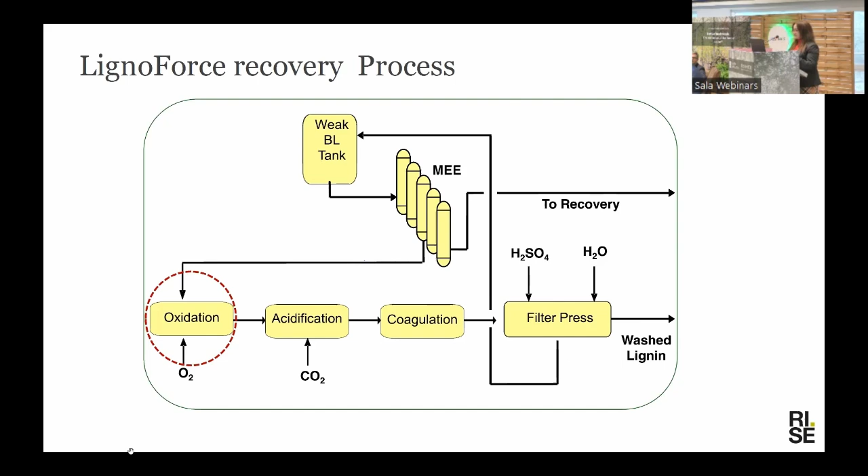Then the same process, acidification and then filtration, and in this case lignin is washed on a filter press.

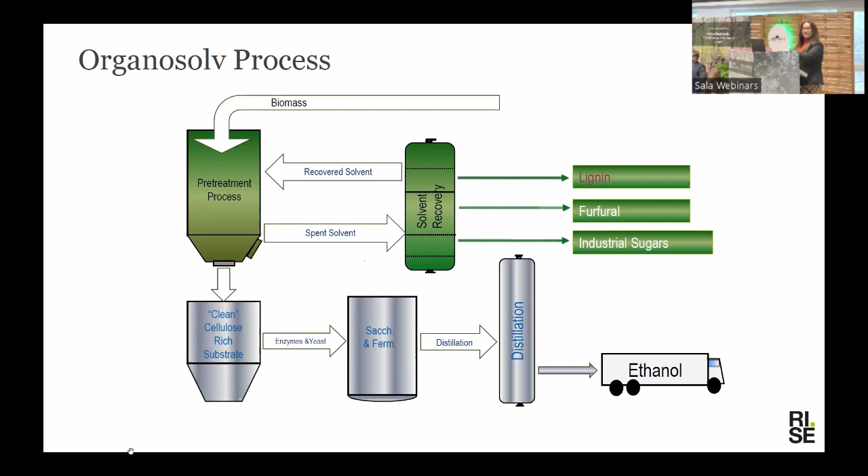So the organosolv process, the most known is the Alcell process. The biomass is pre-treated, so the pulping is done in a mixture of organic solvents. Alcell process uses ethanol and water. Then the lignin is solubilized, and it will be in this liquor that is later precipitated in water or the solvent is evaporated, and you get a very pure lignin. On the other side, you have the pulp. One of the issues with the Alcell process is that the cellulose part was directed to ethanol, which is quite cheap, making this not economically interesting as a process.

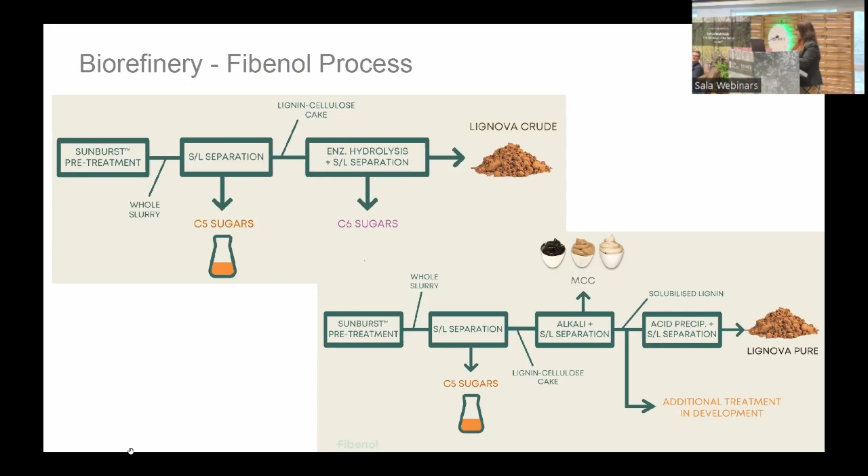Then I want to talk about Fibenol. This is a biorefinery. They have a first stage, a steam explosion process. In the first stage, they remove the C5 sugars, then take the solids, do enzymatic treatment, and then separation. You have the C6 sugars, and then the crude lignin. They then went further, taking the cake, doing an extraction with alkali, solubilizing this in alkali, and removing the hemicellulose, which is a plus for the biorefinery process. Then they take this lignin, it's in alkali, you precipitate it, and you have a pure lignin they call Lignova lignin.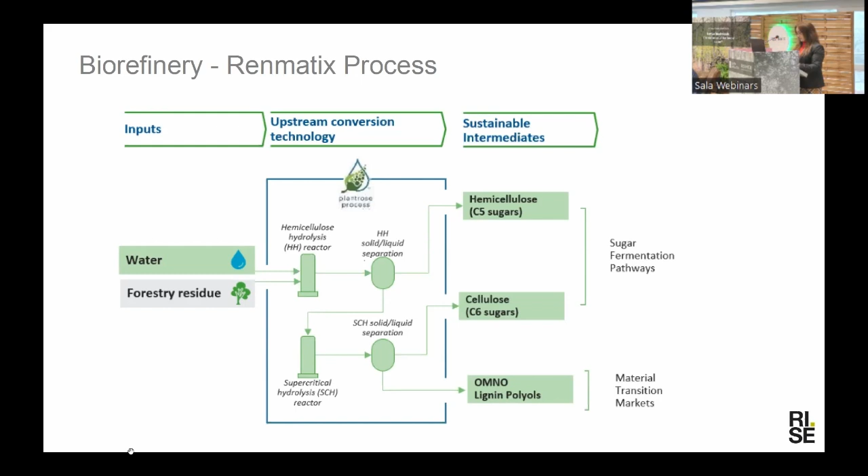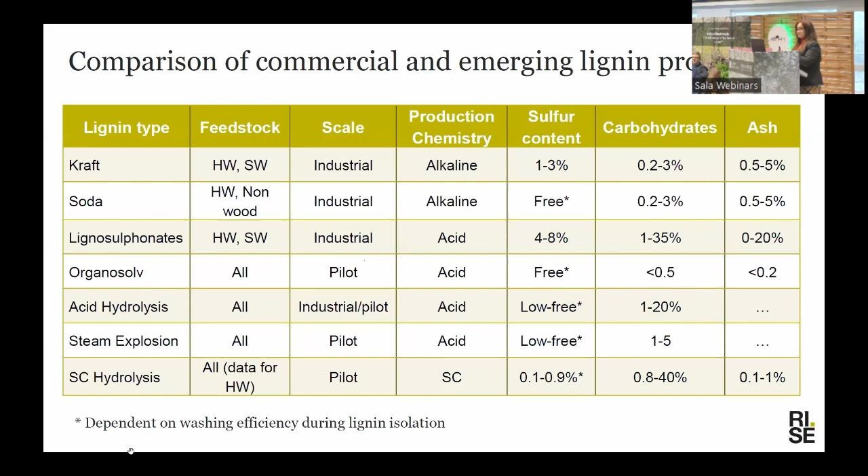If we put this all together and compare, we see different technologies, from Kraft all the way to supercritical water hydrolysis. They all say they can use different feedstocks, hardwood, softwood. We know that some of them work better with hardwood than with softwoods. Different scales, different chemistry, and the extra components besides the lignin, like sulfur, carbohydrate, and ash, have different content. If we look deep into the structure of these lignins, we see variation in the amounts of different functionalities. In general, softwoods have higher molecular weight and higher Tg compared to hardwoods.

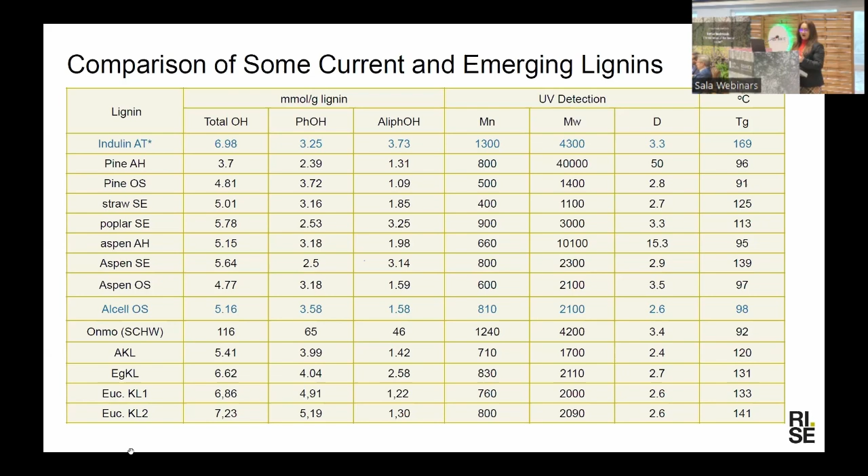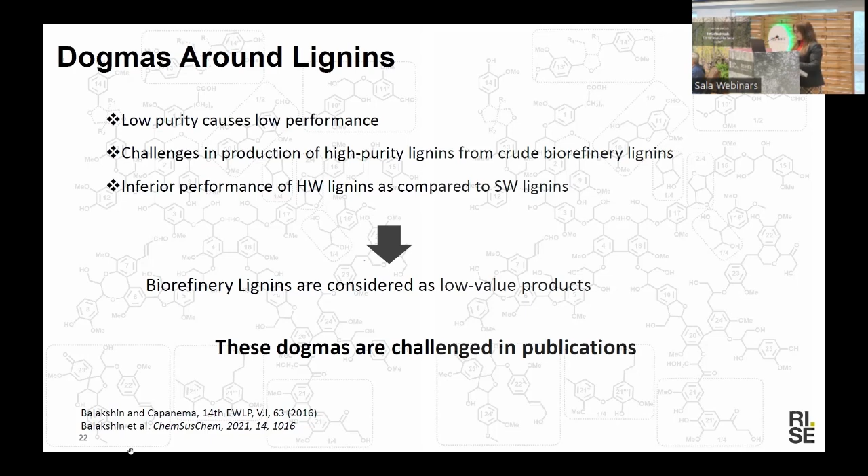And then there are the dogmas. There is really a prejudice with hardwood lignin. A lot of the time, you hear that hardwoods are not good for this or that application, that hardwoods are less reactive, that biorefinery lignins are waste, junk, because they have contamination - here meaning residual carbohydrate - and that biorefinery lignins are considered low-value products. But when you look at lignin and lignin application, everything depends on what application you are using this lignin for. So this concept that hardwood and biorefinery lignins are low value is really questionable.

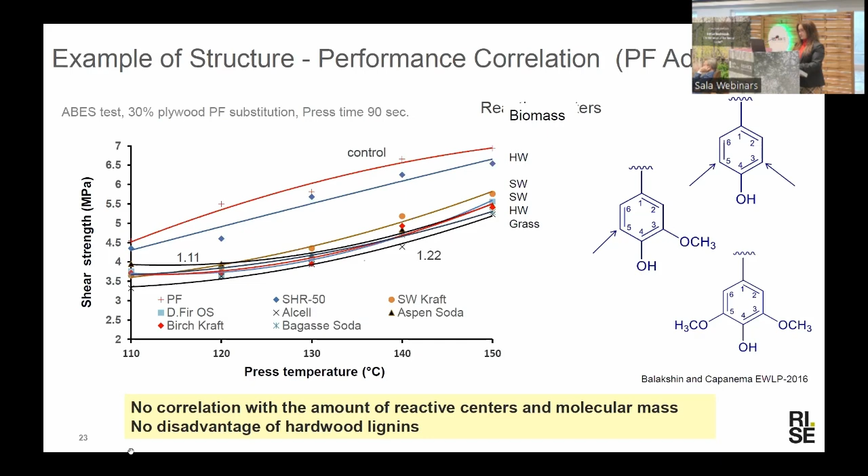And in terms of purity, the same applies: we see the high purity lignins have the same performance, while the best performing lignin here is a biorefinery lignin with about 40% residual carbohydrate, and it still has the best performance. So I think this is what we're talking about - this shift in mentality when we're talking about hardwoods and specifically hardwood lignins.